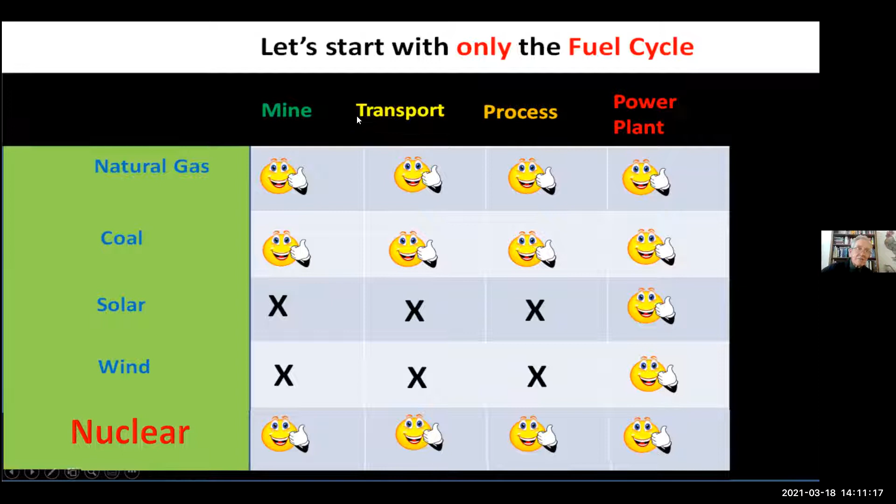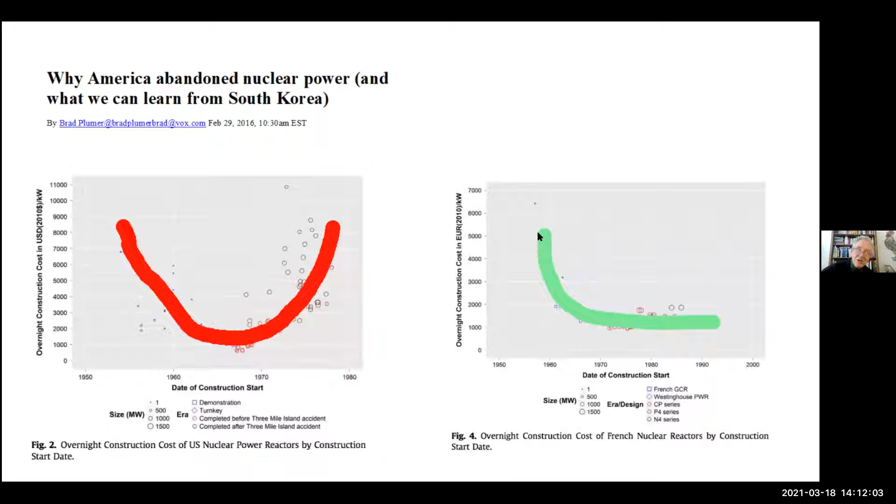This is in contrast with, say, France, where during the same period of time you see the drop, but you don't see it going up. This is due to various things—we tend to like large nuclear power plants in the United States.

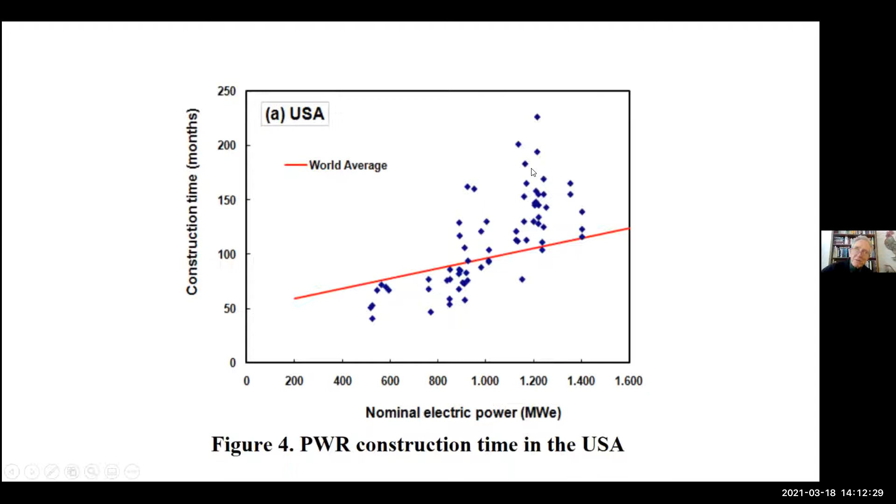This is a comparison of the US data, these dots, with the world average, and you can see we're considerably above in construction time to build plants. And you know, time is money—so if you spend more time building it, it just costs more. That gives us some idea of some of the problems.

Some of those are going to be social problems, like maybe our people are a little more picky than the French were. That has to do with things like how much subsidy the French government gives compared to the US government. But somehow or other, our costs got out of whack.

One reason they got out of whack is because we decided to make every nuclear power plant different than the one before it, so we have no two power plants that are the same. Whereas the French used the cookie cutter approach to their nuclear power plants—they tried to make it as much the same as they could. If you make things the same over a period of time, you learn how to do it and it gets cheaper and cheaper. If you make each one unique, you don't have that learning curve.

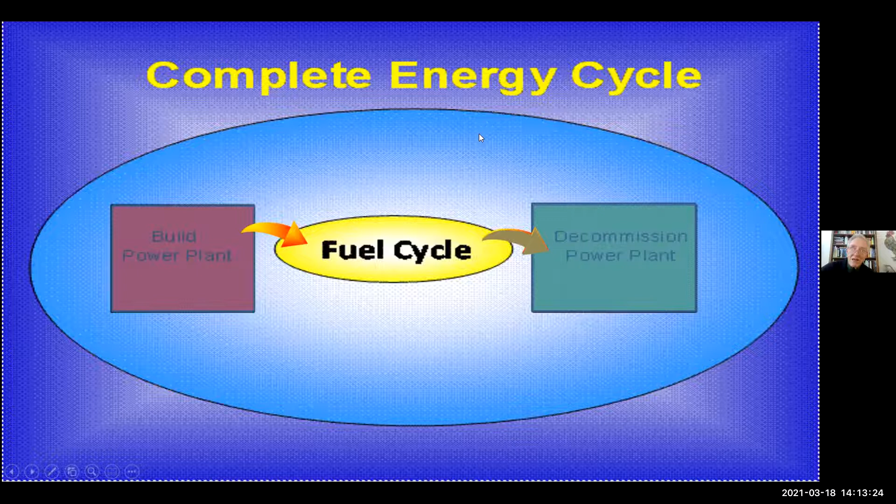The yellow cake then goes through some chemistry functions to turn it into a gas, uranium oxide, and then into another gas, uranium hexafluoride. This gas is then enriched. What that means is that the way we design our nuclear power plants, they won't work with ordinary uranium, which is only about 0.7% U-235. The rest is U-238, which isn't useful for these kinds of plants. So they take this gas and enrich it from about 0.7% to about 4% or so, and that's enough to basically cause our nuclear power plants to work.

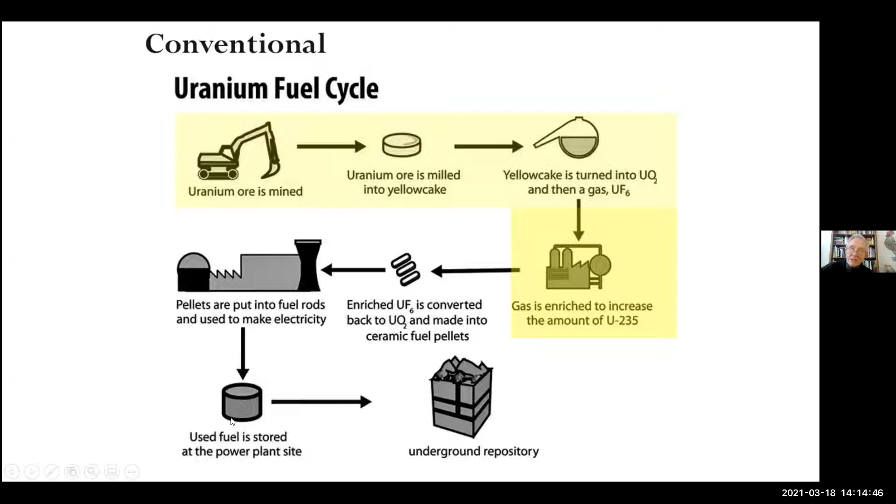So it's converted into little pellets, and we'll show you some examples of those in a minute. Those pellets are stuck into assemblies and put into the power plant, and things are run for a while. This basically leads to taking care of the waste, and we'll spend a lot of time on that.

The materials then get converted into those gases we talked about, and this is the Paducah, Kentucky gaseous diffusion plant. It's a big plant—it takes about 3,500 acres, a lot of water, 26 million gallons per day, and it has 9 miles of railroad associated with it. So this is a big plant, and it uses electrical power at about 3,000 megawatts, roughly 1.5 times the power that used to come out of San Onofre. So this is a big, expensive, power-hoggish kind of plant, and that was used basically to take the uranium from 0.7% and get it up to around 4%.

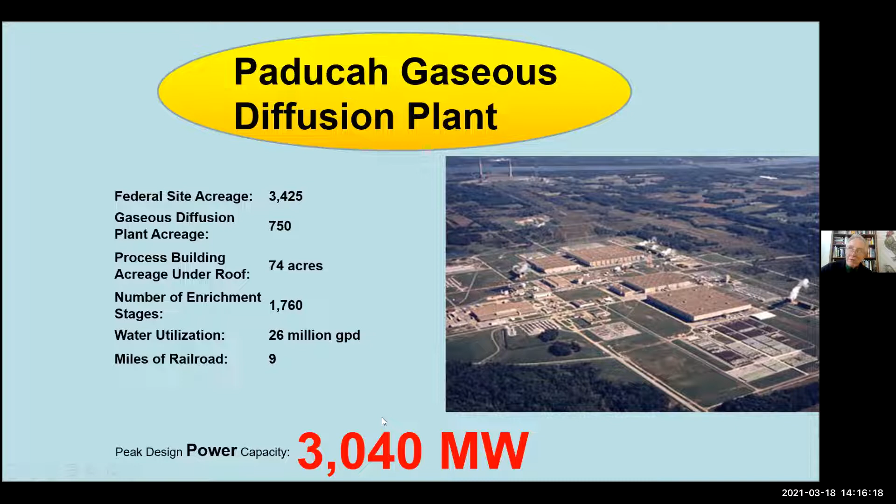Now today we have kind of a different way of powering the nuclear power plants—not all of them, but a lot of them. We basically are powering the plants with used nuclear warheads. How about that for an idea? Both countries, Russia and the United States, used to have about 50,000 warheads pointed at each other. This was during the days of MAD, mutual assured destruction—the idea that you wouldn't do anything because the other guy was crazy enough to wipe your society out, but if you got yours wiped out, his would be wiped out automatically. So it's a sort of a suicide pact.

So anyway, we've decided to reduce those numbers down to a few thousand or so, through the Strategic Arms Reduction Treaty. That's still way too many nuclear warheads, but it's a lot better than 50,000—so we made some progress on that. I was involved in an activity at the Rose Bowl where we were trying to get the government interested in doing something about this, and we gathered 105,000 people into the Rose Bowl in favor of the so-called nuclear freeze.

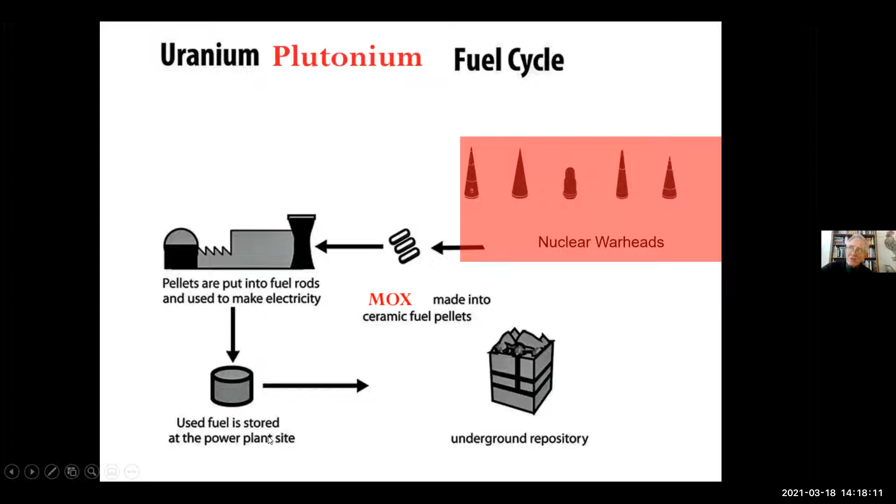So it really worked. Now what they do with this fuel is both sides, the Russians and the US, contribute their warheads. They go into a plant that takes the uranium or the plutonium out and basically puts it into a form where it can be mixed with ordinary uranium into a fuel called MOX, M-O-X, mixed oxide fuel. Then that fuel goes through the normal process of being made into these little pellets and so on. So we have really two different fuel cycles here, one involving warheads—kind of a strange condition.

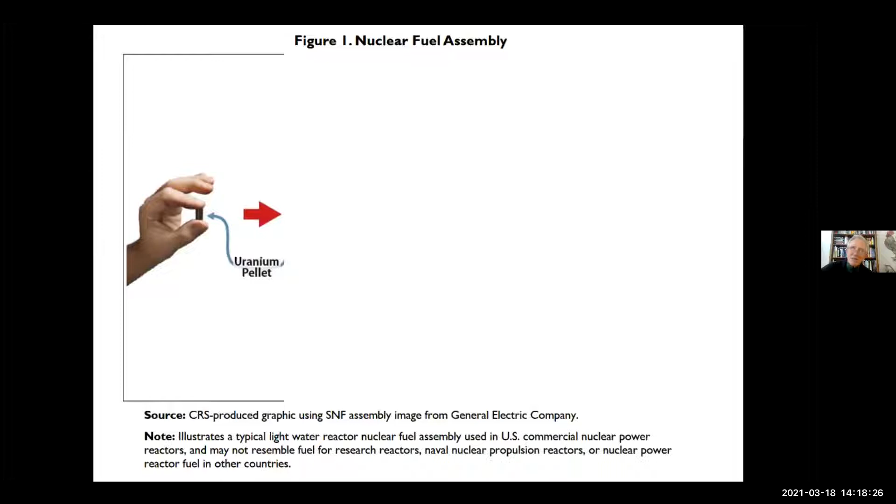So we take these little pellets, which are smaller than your thumbnail, and stick them into a cylinder, a long, skinny cylinder that looks like a long spear, maybe 15 feet long or so. We call that thing a fuel rod. You put some little springs at the end of it to keep the little pellets in firm contact with one another, and that gives you one unit of the system, the fuel rod.

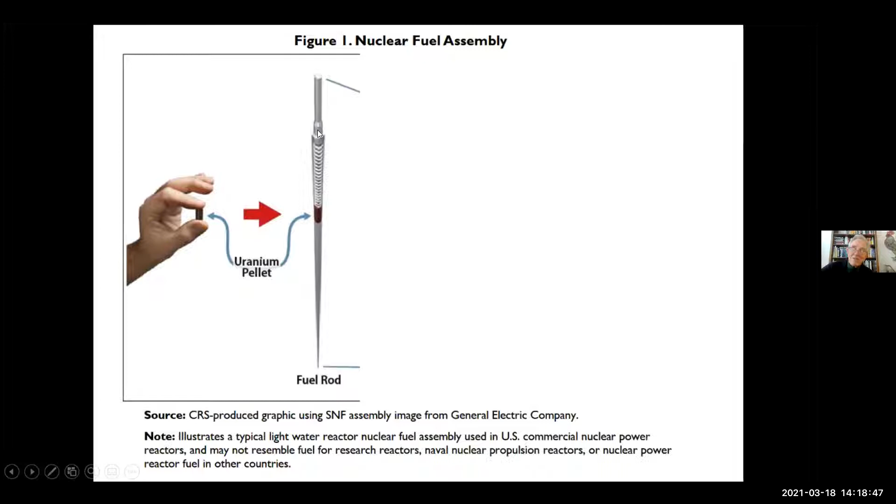We then take these fuel rods and put them into a checkerboard-like structure, with maybe 15 holes on one side and 15 holes on another. So in one of these structures, we can put 225 of these fuel rods. That constitutes a new thing called a fuel assembly. Now we take that fuel assembly, and that's the basic thing that goes into the nuclear reactor to give us the heat that we want from the reactor.

When we're done with the fuel rods—what happens is these are only good for so many years. It's kind of like the old light bulbs, which used to get a coating of dark stuff on them and got dimmer and dimmer over time, so they weren't functioning as well. Well, these fuel rods are like that. The waste that collects inside of them basically causes the whole system to become more and more inefficient. So when it gets to a certain level of inefficiency after several years, what you do is take it back out.

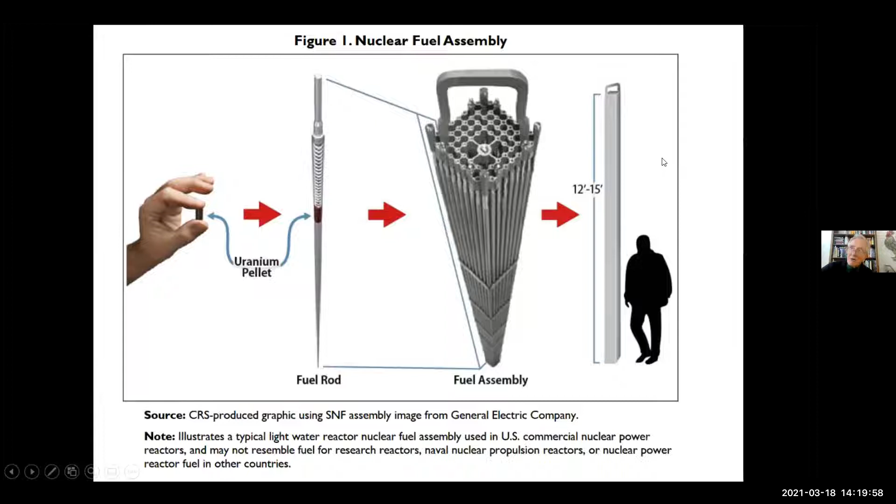You put it into a jacket like this, and put that into a spent fuel pool—it's like a swimming pool. The reason you put it in a swimming pool is basically to keep the radiation from harming people. The top of that fuel assembly would be under about 20 feet of water. Now, in terms of nuclear waste, there are actually two kinds of nuclear waste.

There's fission nuclear waste, which is basically smaller particles that are intensely radioactive and die off fairly quickly on a big time scale. And then there's fusion particles. We don't talk about those too much. These are the ones that are deadly poisons like plutonium, and they last a long, long time, on the order of 25,000 years would be the half-life of a typical plutonium.

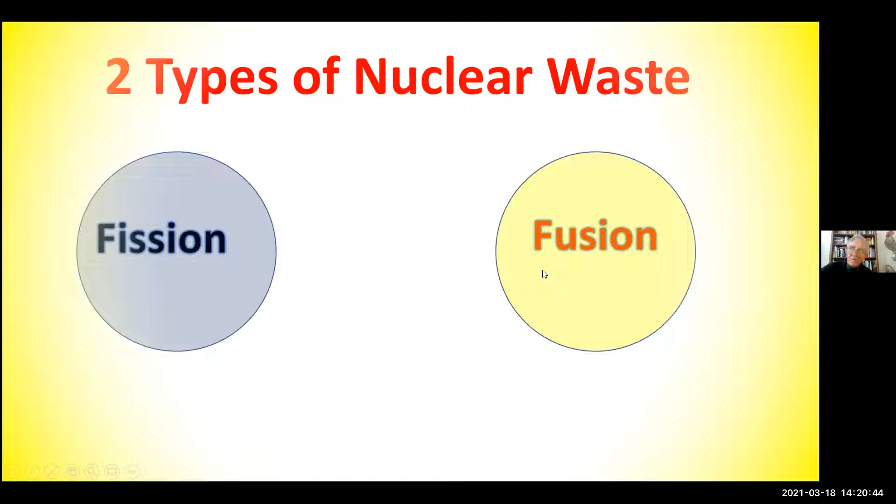Now what happens in addition to just splitting the atom, when you split the atom, you get a lot of energy. So you're getting on the order of 200 million electron volts of energy out of there. Plus, in addition to the energy, you get two neutrons coming out. Remember, you started this whole thing with one neutron going in. Now you get two neutrons going out. So for every one that goes in and gets captured, you get two out.

So you're starting to get into what's called a chain reaction. These two pieces can again each split and give us 4 neutrons. They can split again, give us 8, and so forth. So what happens is you have a chain reaction which can be dangerous if you don't design it right. This is how a nuclear weapon works — you basically design it so that chain reaction just continues and you don't waste these neutrons. Whereas in a commercial power plant, what you do is you allow this to go on a little bit, but you control it using so-called control rods, and that keeps everything safe.

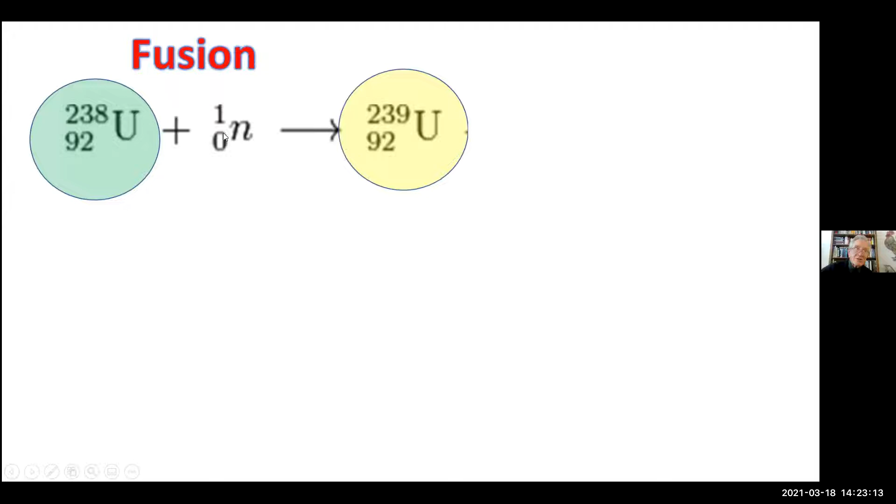This form of uranium has one more neutron than the other. So basically, instead of 238, it's 239. And this turns out to be unstable. So in about 23 minutes, this thing gives off an electron and becomes a new element called neptunium, 239. And now since it gave off an electron, it has 93 protons in there. So basically, we upped the scale.

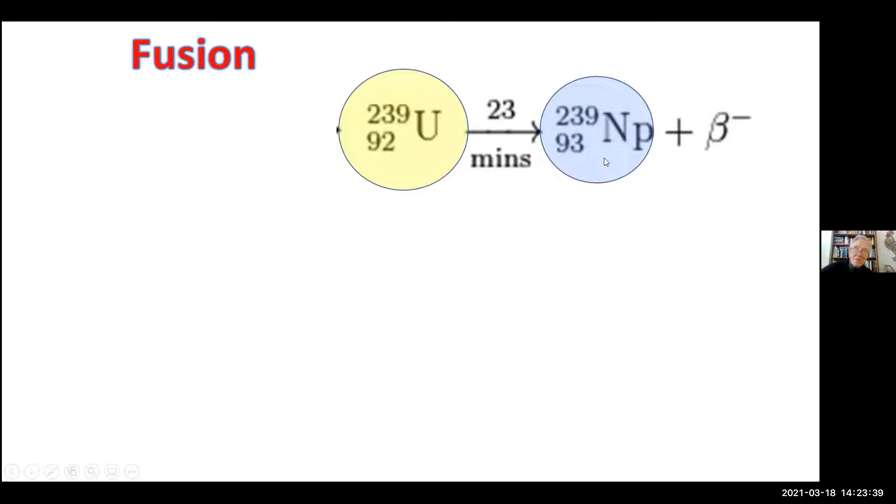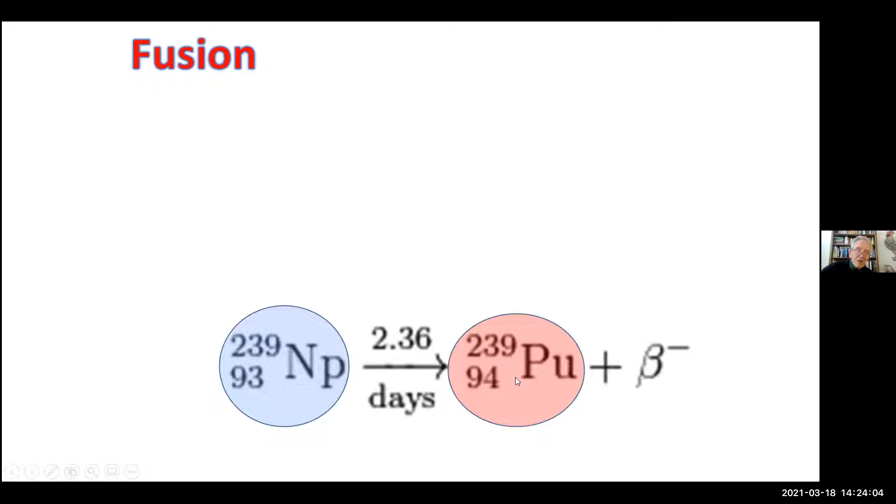And we take this neptunium and allow it to sit around for a couple of days, and it becomes plutonium. So now we have this very dangerous plutonium that can hang around for on the order of 25,000 years, which is the half-life — meaning half of it's gone in 25,000 years. So when we design our nuclear waste repository to contain this stuff, we have to make sure it will be contained for that period of time or longer.

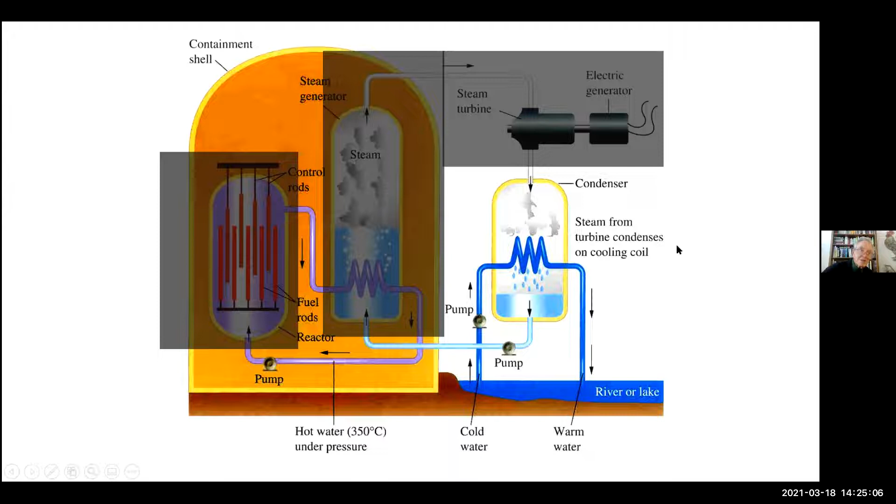This is an example of a nuclear reactor that went wrong. This is the so-called Mayak explosion. I would assume that very few of you ever heard of this one. It occurred in Russia, in a town that was since taken off the map, near Kyshtym, Russia, in 1957. I first heard about it around 1977 at a meeting at the old executive office building in Washington.

We heard about this thing, but it was real hush hush, so it didn't appear in US newspapers until around 1993 or so. This whole thing blew up. It was a combined power generating plant but also a reprocessing plant. It blew up, and what they did is they basically evacuated everybody and put the town off limits for on the order of 40, 50 years. It's still off limits today. So this is an example of a disaster gone bad, and there were many deaths associated with it, on the order of 10,000 or so deaths.

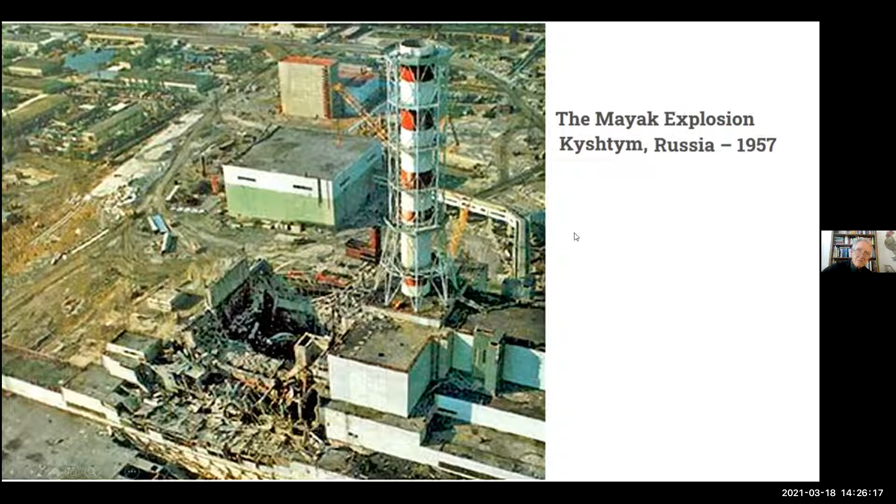This is 3 Mile Island, near Philadelphia essentially. This happened in 1979, where basically one of the reactors melted down. They weren't quite sure what happened. There wasn't any external smoke or anything you could see from the outside, so people were kind of confused as to what went on, but it was a meltdown. This happened about 10 days after the movie The China Syndrome came out, so ticket sales for The China Syndrome soared as a result of this 3 Mile Island. So this basically showed that this could happen in the US.

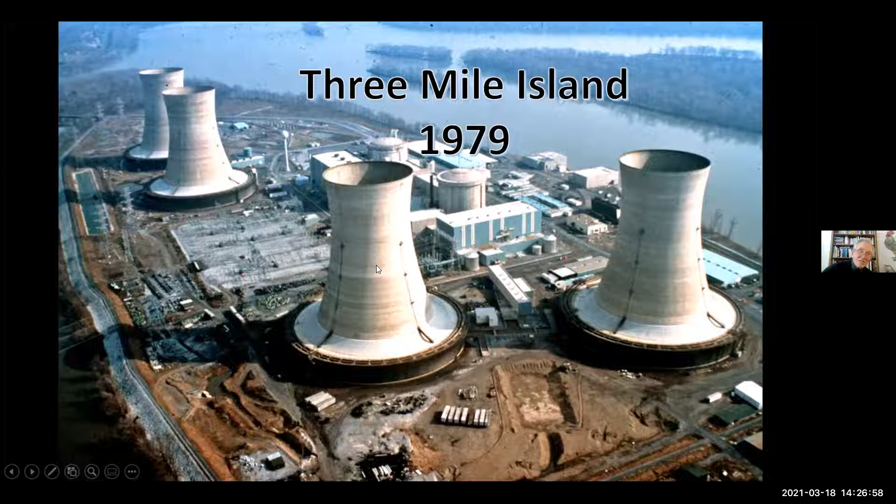This is Chernobyl, you're probably all familiar with that. This happened in Ukraine, basically putting out an awful lot of radiation all over Europe and a good bit of Russia. The KGB had decided that when this thing blew up, they would not issue any iodine tablets. Iodine is usually issued if there's an explosion like this, because the radioactive iodine gets collected by your thyroid and will cause thyroid cancer. So what you would normally do is issue these tablets, people would saturate their thyroids with iodine, and the iodine would just pass through the rest of your system and you wouldn't get cancer of the thyroid. So what happened with these guys is they decided they were more nervous about people getting upset about the explosion than about getting cancer, so they didn't tell them about it. All hell broke loose over that.

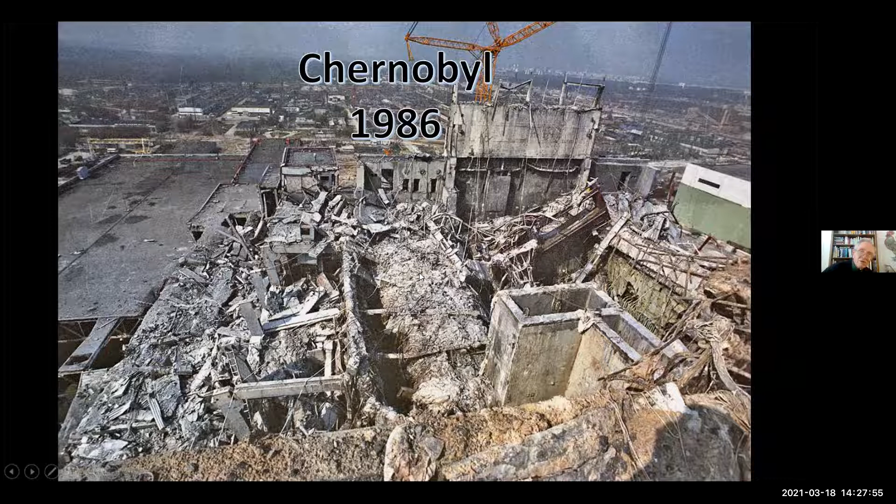This is the Fukushima plant, 6 reactors here, nice looking plant, reasonably well designed. They made some mistakes in terms of the elevation of the plant from the water, and their electrical system could basically be taken out by a tsunami. So what happened is first one of these reactors blew up, another one blew up, and the third one blew up — all 3 of them melted down. And it looked like this: big, ugly looking scars upon the earth there. It's still a mess today, and they're not quite sure what to do with it.

One of the commonalities of all these accidents that I noticed is that they all involved zirconium alloy — that's the coating on these fuel rods — and water. It turns out if you get a high enough temperature, the zirconium will react with the water to produce an oxide of zirconium and hydrogen gas. The hydrogen gas — you're all familiar with the Hindenburg explosion — can explode. So the explosions of all 4 of those plants, we believe, is due to this reaction here. There's the Hindenburg there, so it's a scary kind of thing.

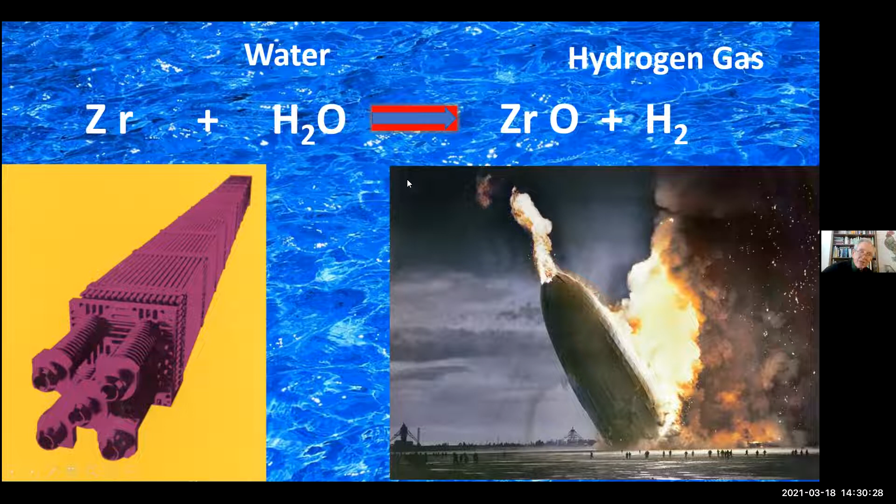So anyway, this is the nuclear waste here. The waste products involve about 33 tons of uranium-235, so there's a lot of it still in there, but you can't get it because of all the waste products. And there's almost 600 pounds of plutonium in one San Onofre kind of reactor — there are 2 reactors in San Onofre. So that tells you you're getting over 1,000 pounds of plutonium per year out of just a place like San Onofre. That's one heck of a lot of plutonium. To make a nuclear warhead takes something like around 10 pounds of plutonium.

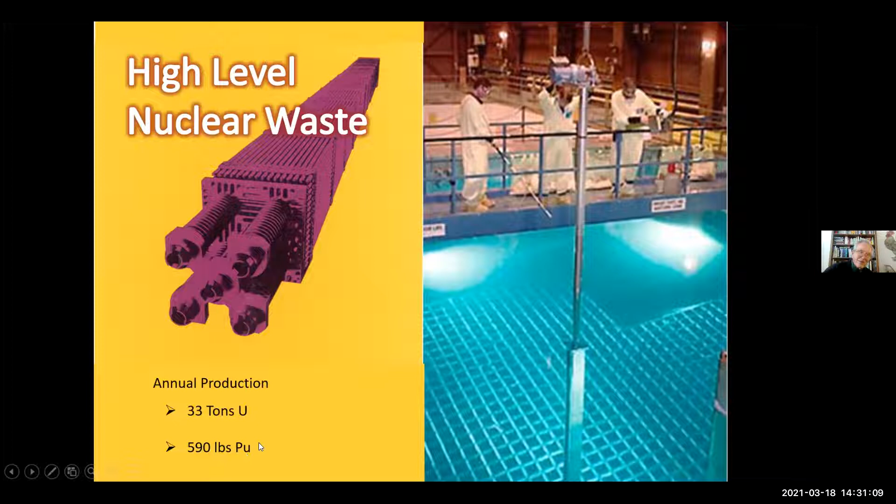So let's talk about decommissioning. One idea is you take this waste and put it somewhere safe so it won't go anywhere for, who knows, 100,000 years or so, maybe 25,000 years. So they picked Yucca Mountain. It was chosen for several reasons: it's away from people, far from Las Vegas - there were very few people in Las Vegas when they made the decision, not nearly as many as now. It was on a military base, so it should be safe from any terrorist threat. And the so-called tuff geological formation there seemed adequate.

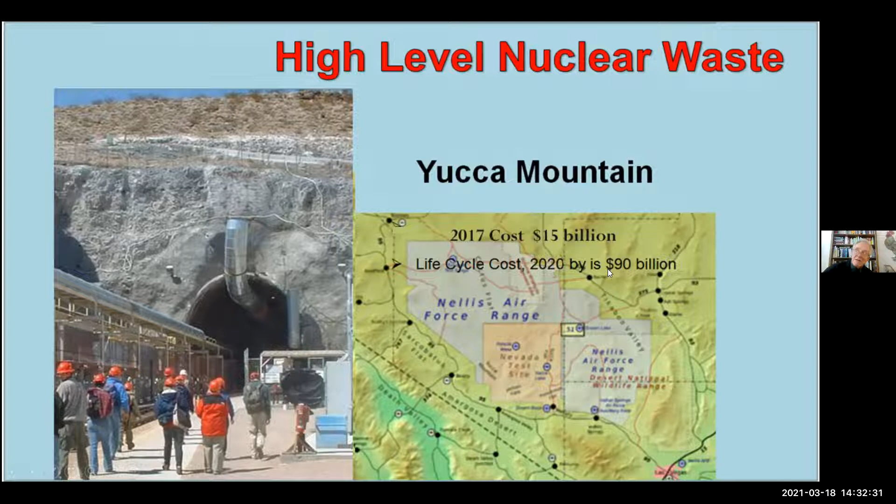There's a guy, Bill Alley, who ran the U.S. Geological Survey function there, examining this geological formation for about 15 years, so he knows an awful lot about it. We've had many discussions on this. They've invested about $15 billion into that site. It's currently not being used because of various reasons. And they estimate that to get the plant fully running, its life cycle cost would be about $90 billion. So it's not cheap.

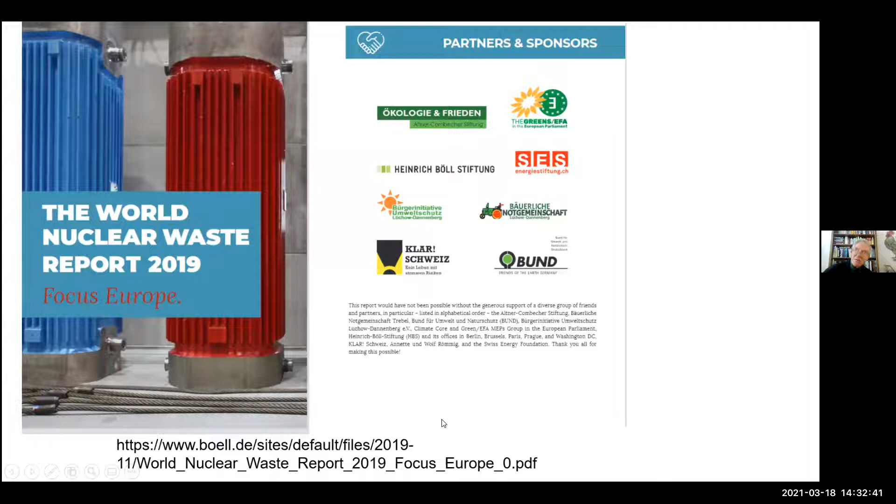This is a report on the world's nuclear waste in 2019, to give you some idea of where other countries are. The French are planning a repository, scheduled to open in 2035. I've been studying these schedules since the late 70s, and they're usually about 10 years in the future, sometimes 15, and that keeps floating. So this is now scheduled for '35, which is about 14 years in the future.

And Germany hopes to open one somewhere around 2031. So who knows what these numbers mean? I always think you can just take whatever date it is and add 15 to get a rough estimate of the current plan. They really are having problems with this, because how do you solve a problem where something has to last for a long period of time? Maybe we can talk about that during the Q&A.

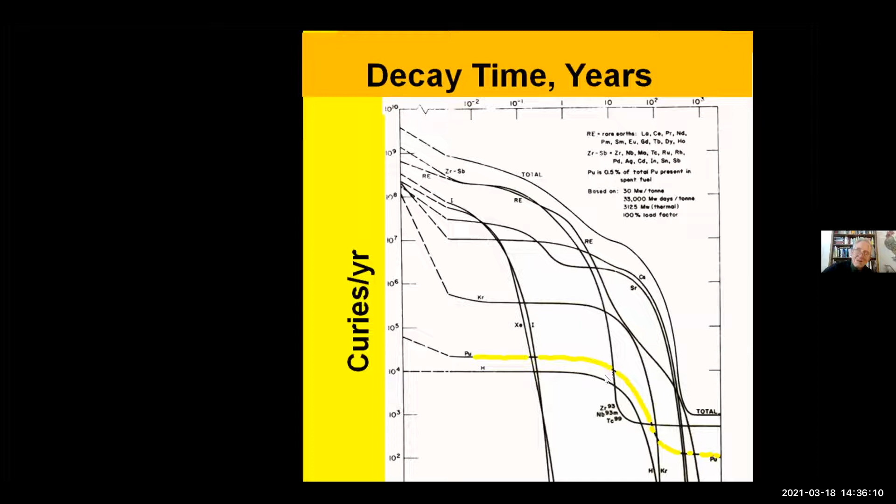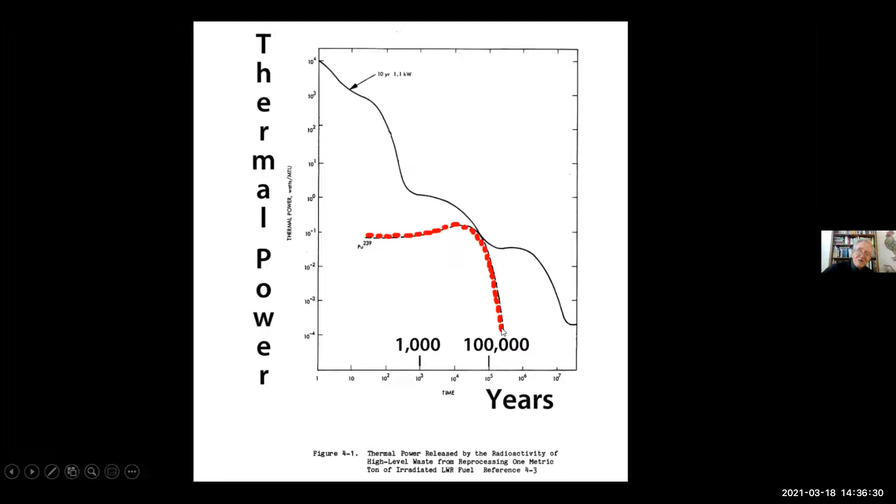This is what the decay curves look like for this stuff - it looks like a witch's brew here. The different radioactive particles decay at different rates. This complex set of curves - each curve shows the behavior of one particular kind of atom. I think I have one here for plutonium. The plutonium doesn't do much on the scale of maybe 1,000 years. It goes up a little bit, then hangs around for the scale of roughly 100,000 years. So if you have some plutonium lurking around, you're going to have it for a long period of time.

One answer to the current problem is we have our waste stored at various nuclear power plants. That's basically because they don't know what to do with it. So if something ever goes wrong there, like a terrorist attack or a big explosion, you're basically holding the people around that plant as hostages. So it isn't fair to do that. You should move the waste to some interim place so it doesn't threaten people—out to the desert somewhere with low population, in a place that's geologically stable. And if geologists can't guarantee it for 100,000 years, maybe you settle for 10,000 years. Do as good as you can, because if you don't, you're threatening the lives of the people near the plants.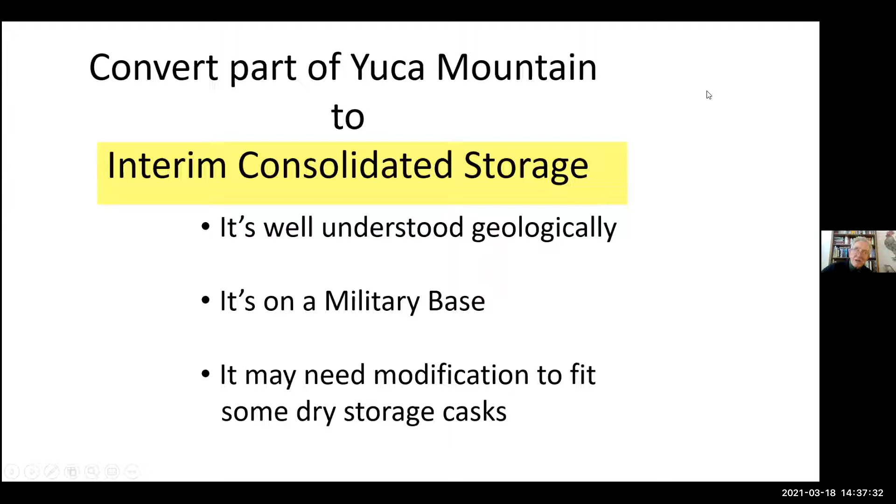There have been various suggestions about what to do with the nuclear waste. Some people say take it out in the desert. Some locals here say put it in Southern California Edison headquarters. Some of them don't like how the Public Utility Commission has been behaving, so they say put it in the PUC headquarters. So we need to do something with it.

The solution that seems favorable now is to get the spent fuel out of the spent fuel pools and move it into dry storage. This is because of the problem at Fukushima, where Naoto Kan said we almost lost Japan. So the idea is to get it out of there and stick it in some dry storage place. The issue we're having is that we aren't being careful enough about where we're sticking it—we need to be more careful about how and where it's stored.

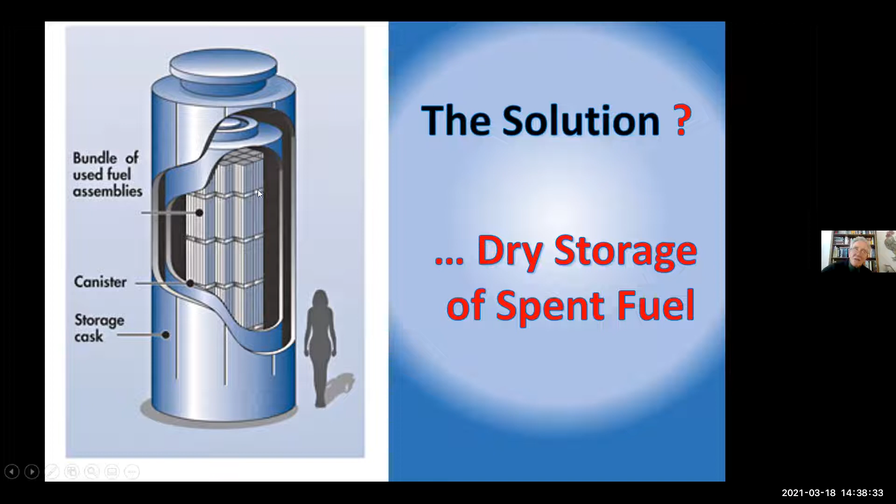One question has to do with Yucca Mountain. Apparently there have been reports that up to $15 billion was spent building that over a long period of time. Whatever happened to Yucca Mountain? Why did it get shut down?

Well, lots of reasons for that—that's a great question. One is the behavior of the federal government. The feds tend to be pretty pushy on nuclear issues, and they don't like to get much pushback from the locals. So they basically picked Nevada because it had the weakest congressional delegation, and they thought the geology would be okay. But there was a lot of annoyance going on there. As soon as Harry Reid got his position in the Senate, they immediately called the thing dead. So what happens is if the government doesn't work well with the locals, the cities, the states, the people get angry about it. So one of the reasons is anger.

My take on Yucca Mountain is that the geologists will give you a guarantee there for about 10,000 years. Right now, you just have the stuff sitting somewhere with no guarantee at all, right next to a big population center. So I think the choice favors going with Yucca Mountain.

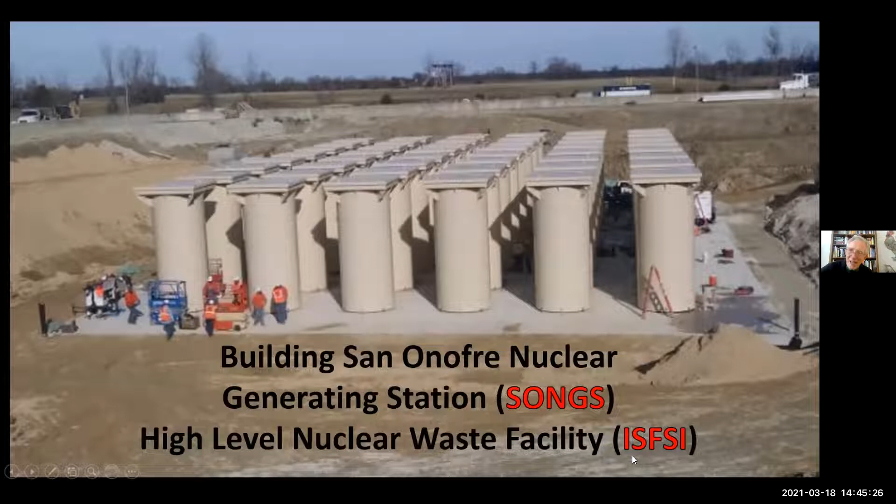It's interesting that they don't call it a high-level nuclear waste facility. They call it an ISFSI. What an unpronounceable, weird name. ISFSI, Independent Spent Fuel Storage Installation. If that won't turn anybody off, I don't know what would.

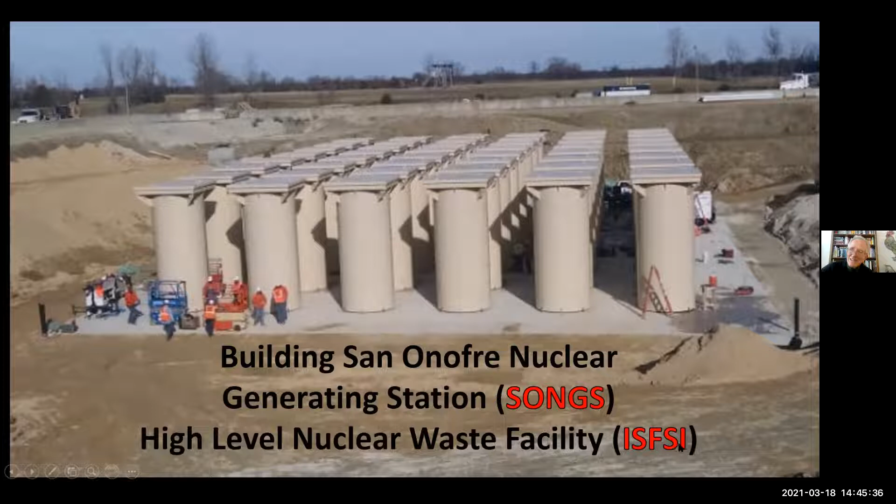So this is what it looks like. What they do then, after you get all this put together, is you put dirt inside here. You put some concrete caps over the whole thing, and that basically is your assembly. This is what it looks like when you're done.

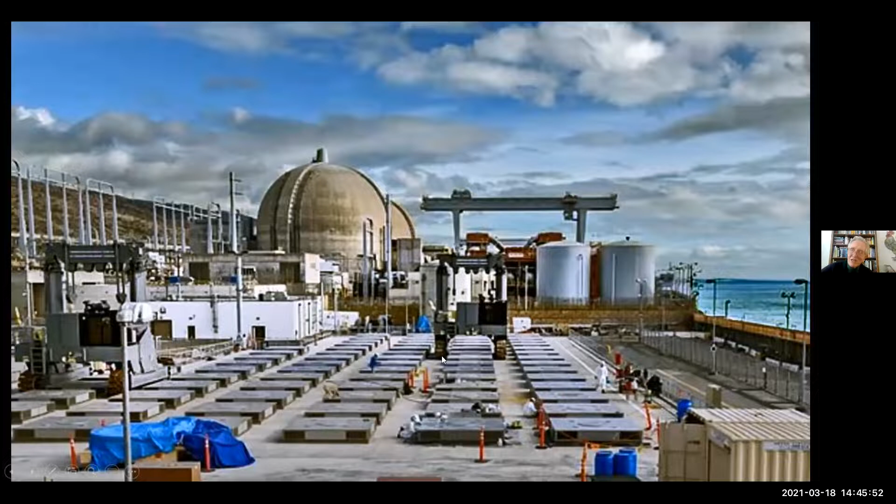So there's the two nuclear reactors, so-called—they brilliantly labeled them Unit 2 and Unit 3 because there was a Unit 1 earlier that they had already gotten rid of. So one of these things here will take one of those canisters that we talked about.

So this is what it looks like. And you can see off to the right here, if you look closely, this body of water here called the Pacific Ocean—so it's really close. Some days, when the waves are splashing out there, people were surfing right out in front of us, you see people on surfboards. Some days when it's splashing, you see water hitting the area there.

This is the casket that we're talking about that would go into the ground for this ISFSI. Basically, it's a circular casket, and these are the slots for the 37 fuel assemblies. One of these goes into here, and then you get a second one. You do that 37 times until the thing is full, and it weighs roughly about 54 tons. So it's a very heavy, very expensive thing.

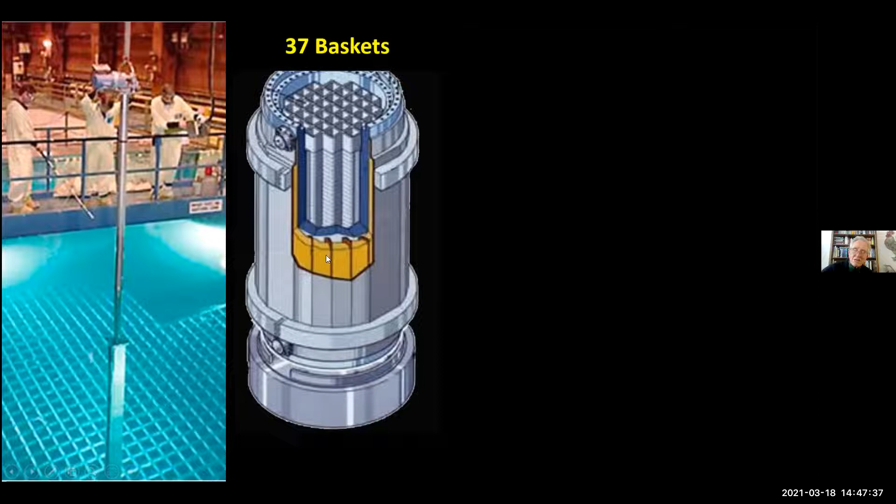So what happens is it gets banged from side to side, gets scratched on the way down. So this is not very good technology. One of my friends referred to it as Egyptian technology, meaning Egypt during the time of the pharaohs.

So he listened to what they had to say in the meeting. The meeting went on for a couple hours, and they never said anything about the accident. What accident? There's no problem here. So he basically got up, and his speech went something like this: there was a serious accident involving the facility. I'm going to tell you about it because my kids asked me to. I don't know whether I'm going to have a job tomorrow.

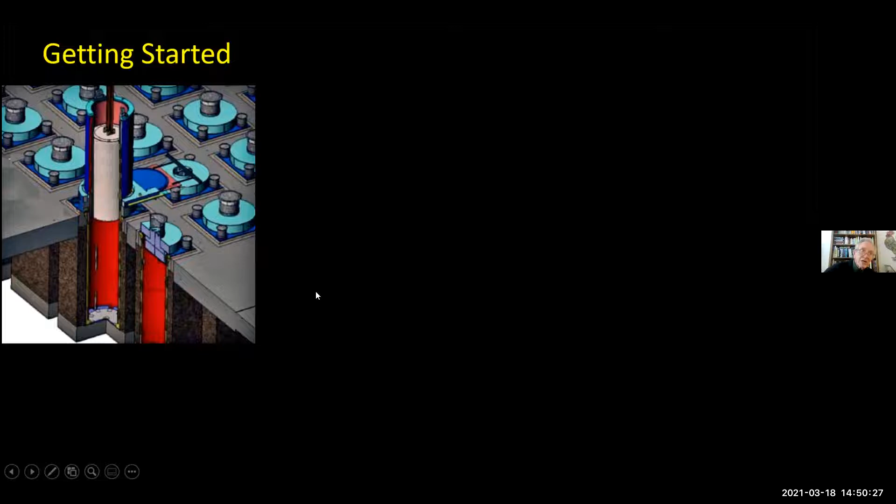So this is how these things get started. We have the canister being pushed into this hole in the ground, and there's a shield around it. The shield is to keep people from getting exposed to intense levels of radiation. So the shield protects the people, and the canister is lined up with this hole in the ground. What you do is put it in there, and you have cables holding it to keep it from falling. Then it goes down lower and lower, cables letting it go lower and lower, and finally it gets to the bottom. So that's what's supposed to happen, that's the basic idea.

So what happened on the day this whistleblower is talking about is there was a so-called near-miss incident. It got down a little bit into the hole and got stuck. Now, they didn't know it was stuck because the way this thing is designed, they cannot see what they're doing. They couldn't see what the cables were doing. They thought the cables were fine.

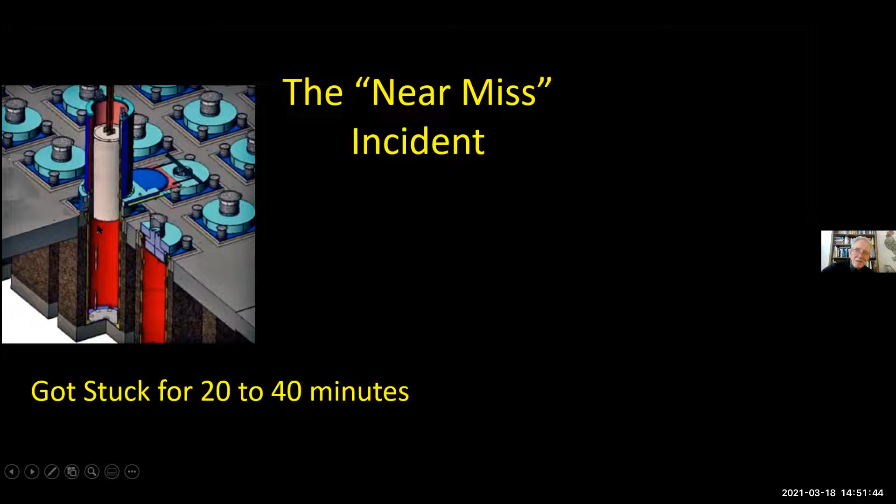So what they did is they decided this thing was down at the bottom. They basically took the cables and had them laying around there - they were no longer holding this thing up. The cables are there to keep it from falling, essentially, so there was nothing holding it up. It was just caught on the lip of a piece of metal for about 20 to 40 minutes, and these cables were laying around with no tension in them. If that thing had gotten past that lip, which it easily could, it would fall 18 feet.

So these guys running the thing are like three blind mice. They don't know what they're doing. They can't see what's going on. They can't hear what's going on. They don't know what's going on. It's a sad, pathetic design - I mean, they knew it was this bad. There are some other things wrong with the design, but this is one of the worst features.

So let's suppose we drop the cylinder and it hits the bottom concrete. It'll hit at about 23 miles an hour. This is the kind of problem you give freshmen in a physics class: cylinder drops, has a mass M, goes 18 feet, hits at 23 miles an hour. When it hits, you can calculate the energy of the bang - it's equivalent to 2 large sticks of dynamite, or 2 megajoules.

Now you can be sure that's going to wreck havoc with the surrounding structure there. And remember, those canisters are real close to each other. You could easily get a problem where the intervening space gets messed up and causes the ventilation system to fail. If that ventilation system fails, there's nothing to keep this thing from overheating. And if it overheats, you basically get into the zirconium problem we talked about earlier.

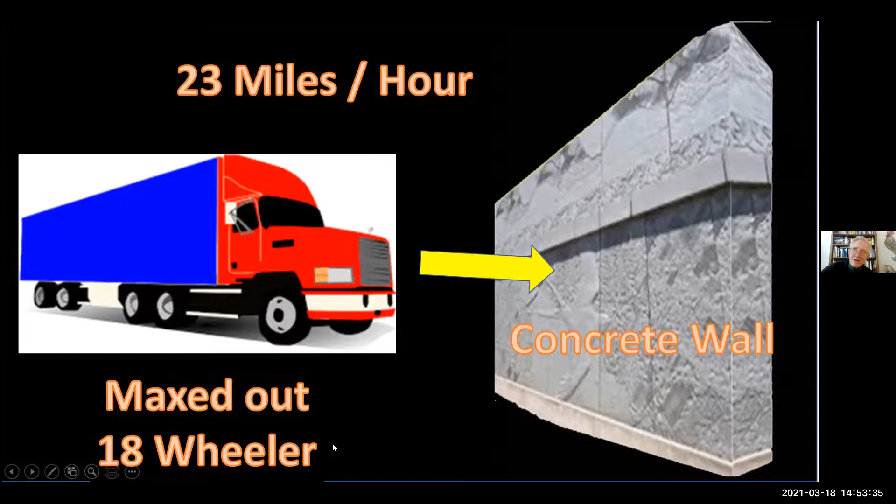And if there's any water around, the thing is going to explode, in addition to this being equivalent to 2 sticks of dynamite. That's a very dangerous thing they didn't even choose to report to the public. It's also equivalent to an 18-wheeler truck, fully loaded, smashing into concrete at 23 miles an hour. You can see this is a model of what it would look like. The crash is bad for the concrete, wrecks the concrete, bad for the truck, and bad for the contents.

The Nuclear Regulatory Commission did a study many years earlier of what would happen to a spent fuel canister under these kind of conditions, and they basically concluded that it would split open. So if you have a split open canister, the thing's heating up, and with water, you're going to have an awful situation. There's also a specification they have, which is kind of an interesting thing.

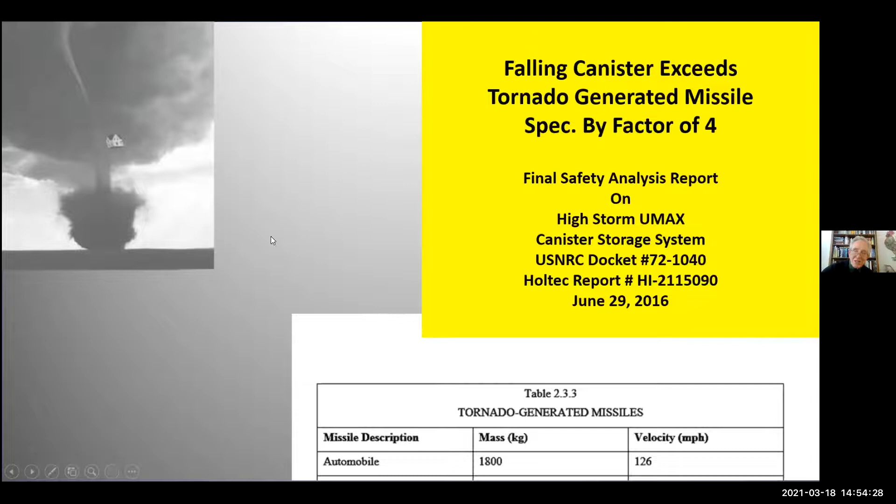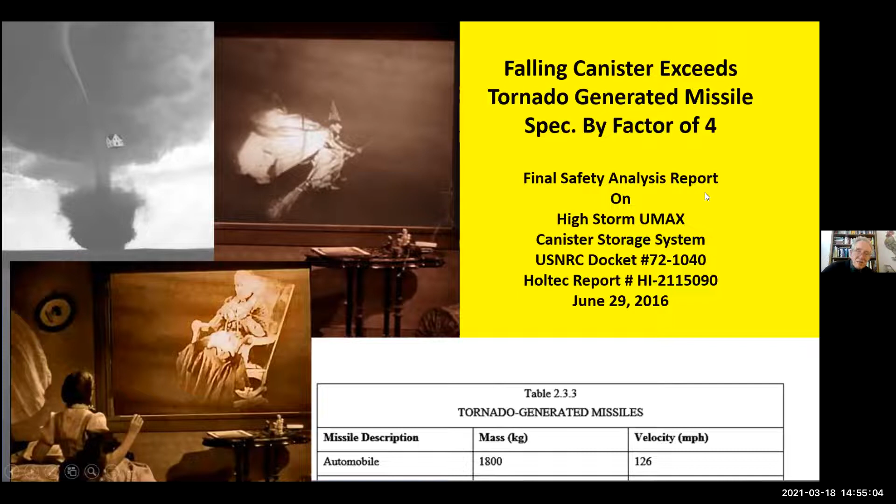We showed this to the NRC and talked to them about it many times, and they basically just weren't interested. They were not interested in the fact that this basically exceeded their specifications. That's a shocking kind of organization to work with, because you think they're on the side of trying to keep people safe, and on these issues they don't appear to be on that side.

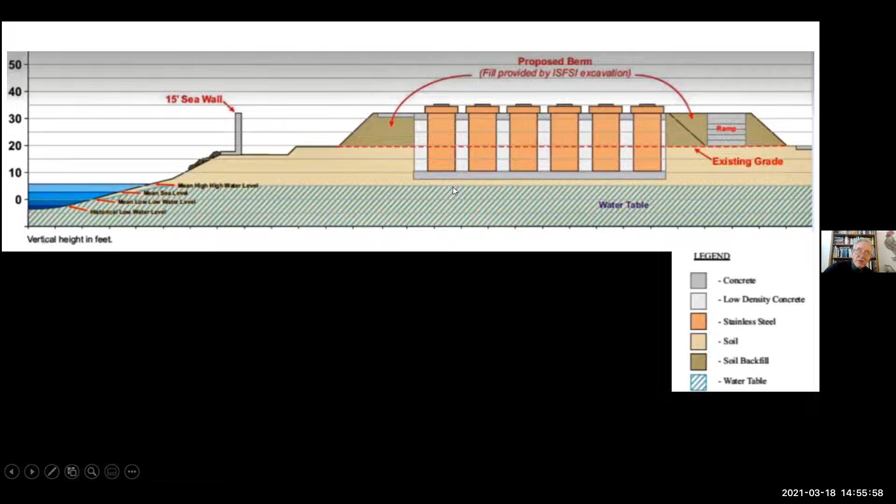This is what the thing would look like, the ISFSI, if you made a cross section of it. This is the ocean out here, and the tides go up and down. This is the mean high tide, meaning sometimes the high tide is higher, sometimes lower, but that's the mean. The mean high tide comes along this line, about 18 inches below the bottom of the canister today. There could be some groundwater from the hills, but let's assume there's none here. So today there's an 18-inch gap before the water would reach the bottom of the cylinders.

Now, Jim Hansen, who we talked about earlier, made a prediction that sea level rise is going to rise about 10 feet by 2065 — that's fairly soon. So if sea level goes up 10 feet from the current situation, the canisters would routinely be in salt water, a couple feet in salt water routinely. These things aren't designed for that. What happens is you're going to have corrosion, and since it's already scratched, those scratches are going to grow on the set of cylinders there. It's a very, very bad location.

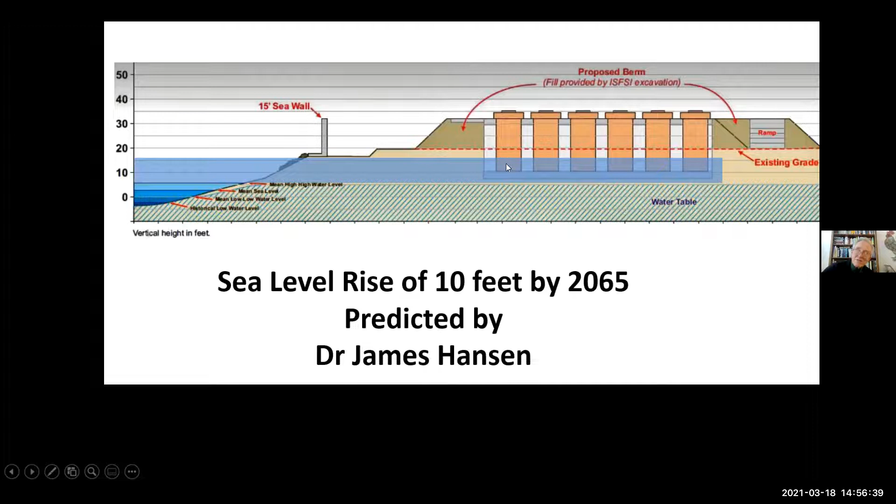I'd like to introduce you to a few of the people that worked with me on this. We formed a little team of people to do the nuclear waste analysis. The idea was you don't want to get stuck alone on this sort of thing, because it's good to have others to talk to so you can make sure that what you're doing is right.

This guy is called Subrata Chakraborty. He normally spends his time looking at samples that came from a spacecraft launched to essentially capture particles floating around from the sun. He had all this fancy equipment in the back there that allows him to basically see what is in the solar wind. So Subrata, this is a picture from one of the videos that we were involved in.

This is another guy who was involved with our team. He and I were doing a duet at KPBS. This is Greg Jaczko, the former chair of the Nuclear Regulatory Commission, and there's me.

We put a report together — me, Subrata, and the guy you'll meet in a minute, Rear Admiral Len Hering — basically on what the main issues of nuclear waste are. In the report, we said there's a very bad location, the equipment and processes used to move the nuclear waste are poor, and the management is really defective. So you've got three major things wrong with the facility. It led to the Nuclear Regulatory Commission shutting them down for a year, and they then let them get back working again without really fixing the problems.

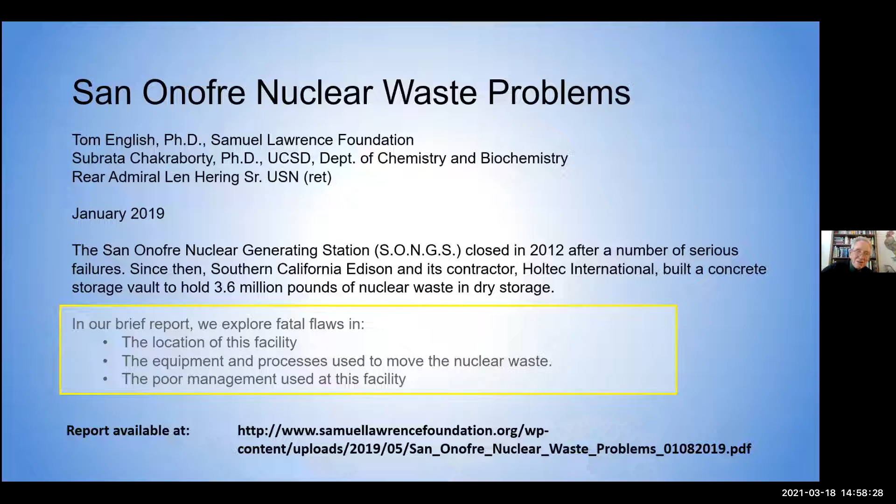This sponsored Congressman Mike Levin to form a nuclear waste task force. Here's Greg Jaczko, he's on the task force, he's the co-chair. And there's Rear Admiral Len Hering, he's the co-chair of the task force. I was on the task force also, and so was Dave.

So there we go, more questions. We have several. Charles Langley is asking if you could talk more about fusion. Does fusion have spent fuel risks? Let's see, fusion, well we can talk a little bit about it.

Basically it's how the sun works. There's this fusion reactor, whatever it is, 93 million miles away, works fine out there day and night. The problem with fusion, one of the problems, is the problem of schedule. I first got involved in fusion at Project Matterhorn, which was at Princeton, back in the, this is around 65 or so, something like that. The basic concept was they were going to contain this plasma and have these fusion reactions, where you basically take various things like deuterium and tritium and smash them together, and they fuse together to form helium, and it gives off tons of energy.

So anyway, the schedule was they're going to be doing it in a serious way in 20 years. So that would have been, let's say, 85. And in 85, the schedule became 2005. And today, this is around 2020, so the schedule would be about 2040. The schedule keeps slipping. They are making progress in terms of the ability to contain the reaction, they contain it longer and longer. Still not very long, but longer than it used to be.

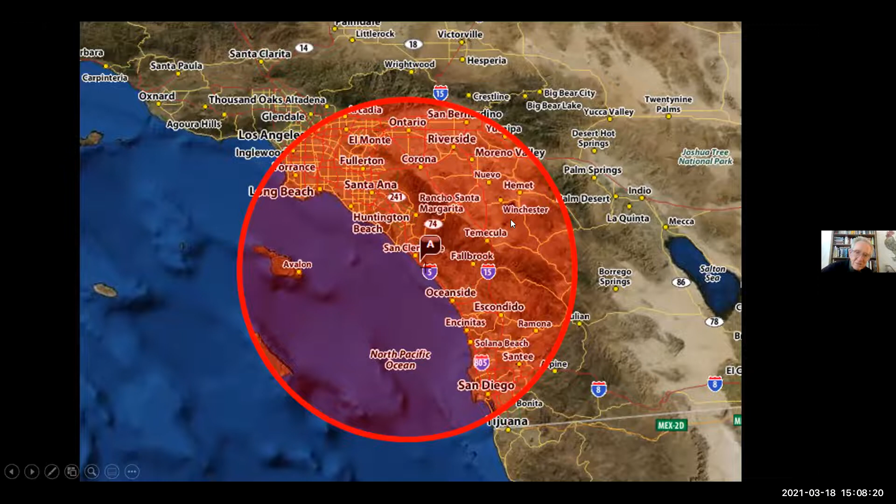Their bottom line is that the cost over roughly a 50-year period would be about $13.4 trillion. That is a lot of money. That's the kind of money that could wreck Southern California, could wreck the economy of California, might even put a serious dent in the world economy. So it's big bucks, and it's something you should avoid.

This is a guy who looks into some of these issues. He's really good at doing the economics, and he's also good at doing the science. His name is Amory Lovins. I've known him since my early days at JPL. I met him—he's a visiting kind of consultant, I'd call him. He's worked for kings, queens, prime ministers, presidents, all over the world—a very famous guy. He's the first one to basically show that the US could save an awful lot of money by adopting better energy strategies.

Anyway, I met Amory at JPL. I was in a bad mood one day, and this guy was coming to give a talk, and I'm there looking kind of glum. He said, 'What's wrong?' I said, 'I'm just feeling glum.' So he comes up to me and gives me a back rub. I thought that was a pretty good introduction to the guy. And I've been following his activities ever since. He's done an analysis here that asks: does nuclear power slow or speed climate change?

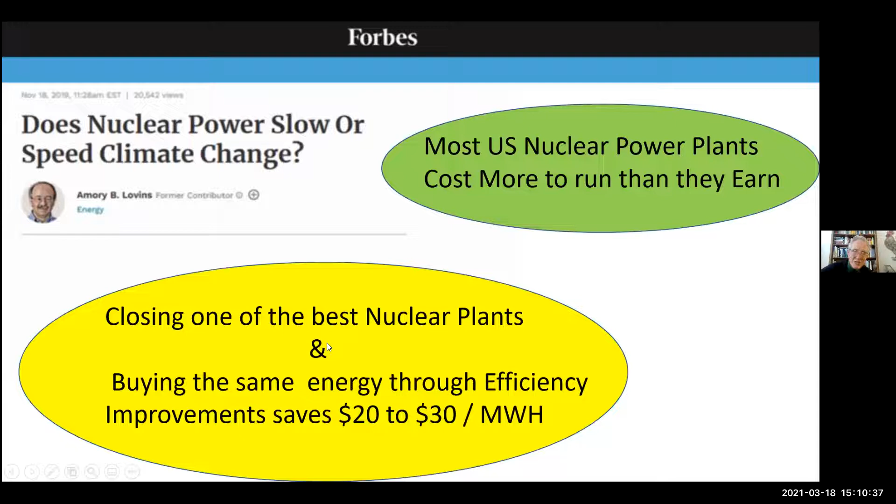It's like a charitable organization that we taxpayers happen to be paying for. He also says that if we take one of the best nuclear reactors, not the real dogs but one of the best ones, it costs so much to get a certain amount of energy out of it. We could buy the same amount of energy through efficiency improvements and save $20 to $30 per megawatt hour. This is an enormous savings.

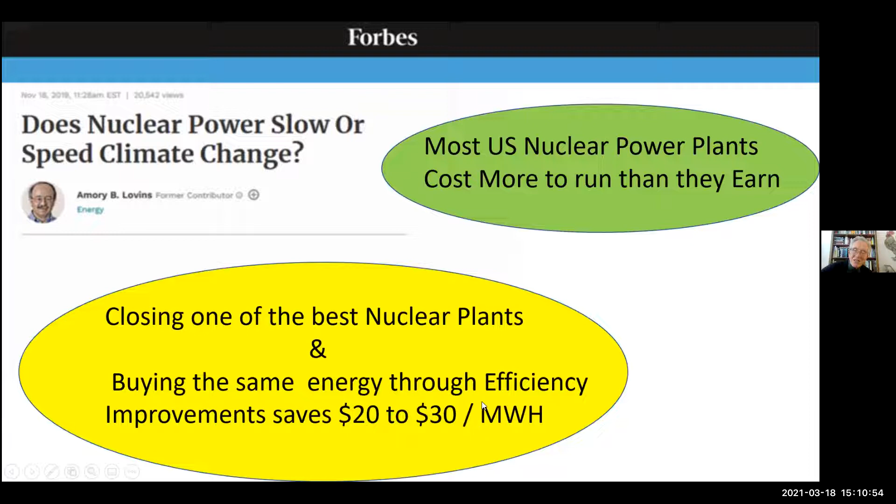His conclusion is that building new reactors, or operating most existing ones, makes climate change worse compared with spending the same money on more climate-effective ways to deliver the same energy. So if you can buy, say, a wind farm that gives you energy for a certain expense per kilowatt hour, and that expense is half or three or four times less than the cost of just keeping a nuclear reactor running, not even building it, then you're foolish. You should shut that down and shift to something that gives the same energy much cheaper. That's basically his thrust.

So here we have two guys, both superheroes of mine, in complete contradiction with one another. This is a classical problem you see in science - science is like public arm wrestling. You basically fight in the court of public opinion, and after a while, if your argument is weaker, you have fewer and fewer followers, and pretty soon you're not the winner in the scientific community. This is a perfect example of that.

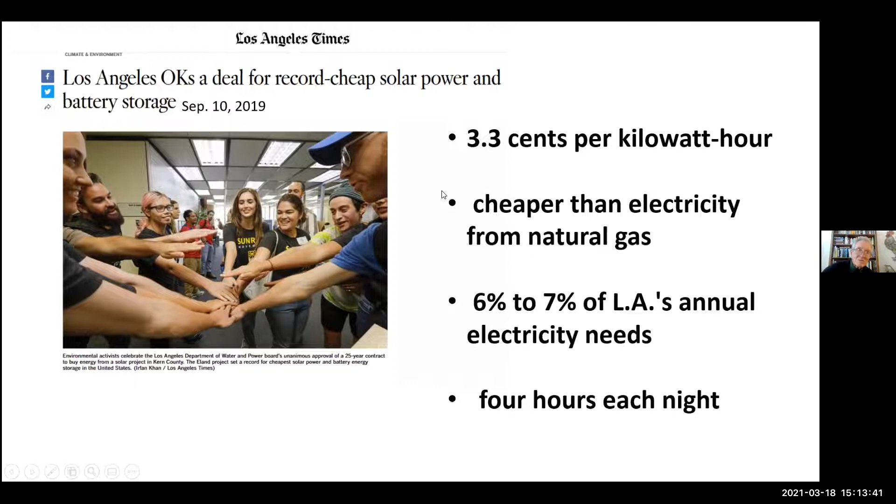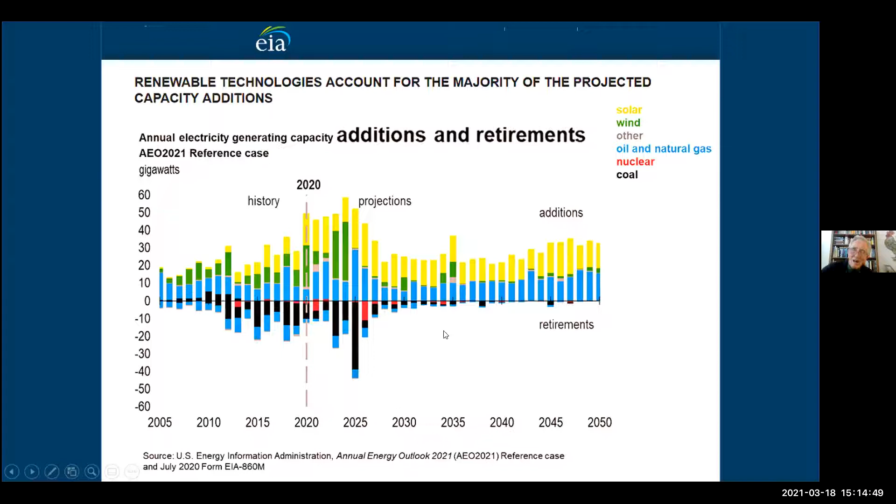I think this graph is very significant in the fight between Hansen and Amory Lovins. It basically says that the bankers and people like that are really on the side of Amory, and that Jim had better just stick to his climate change work rather than getting involved in power plants. It just says there aren't going to be any new nukes, period.

Bill Gates, though, gets involved in this, and this is interesting. He's come out with a book, 'How to Avoid a Climate Disaster.' I've bought the book and read maybe 50 pages of it - it reads really well, and I like his stuff. He basically says the current nuclear power plants are not good; the waste problem appears to be intractable. What he wants to do is build a new kind of nuclear power plant called a traveling wave reactor to help out with this. So I'm trying to understand his traveling wave reactor - I'm a bit of a skeptic, but I'm going to give him a chance and see what happens.